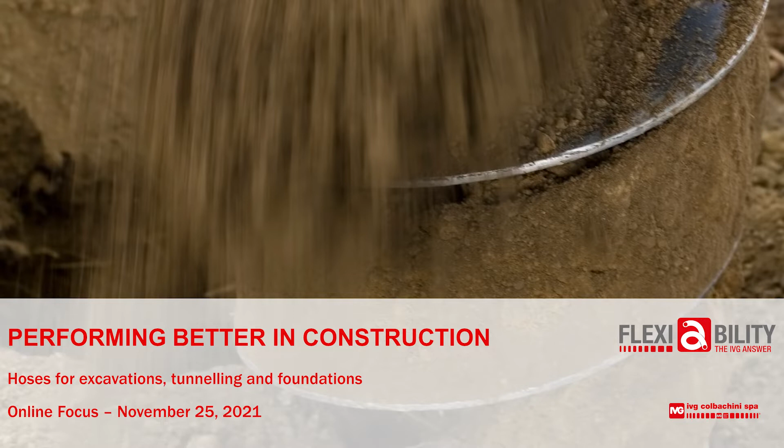We will explore a little bit a very specific field, a field where our hoses are used, engaged and involved. I mean the field of construction sites where great works are built. But to have a better idea of this, look at this video.

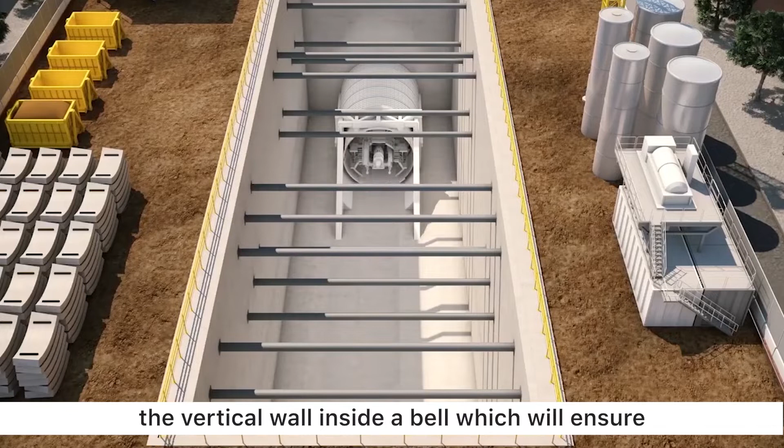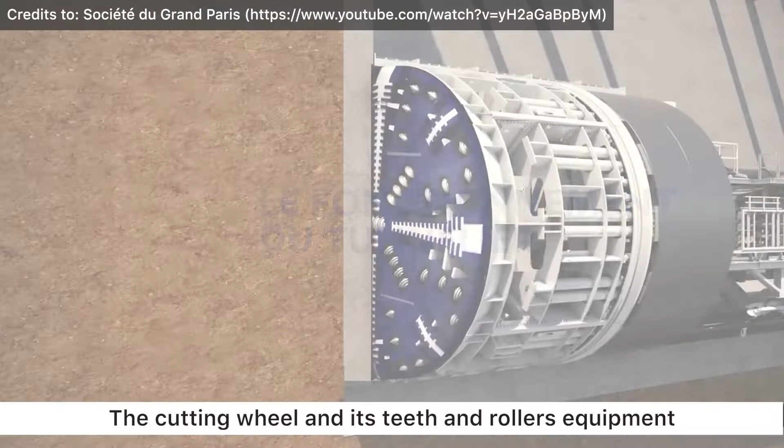Fabio now will help you and will explain how to save money and save you trouble, right Fabio? Yes, it is, Stefania, thank you. The video was amazing, and imagine that there are thousands and thousands of works like that. And imagine also that these involve plans, materials, people, costs and budget.

And imagine if any failure occurs. Your work must be perfect. We know inconveniences happen, but we want that this doesn't happen. Imagine, for example, when you have to redo your bathroom. This really happened to my family, for example. And some inconvenience occurs with the plumber or material, etc.

You don't want it at all, because you risk losing money, losing time, and I will also say being scary, being annoying, because you need to find a solution promptly. What you need is to make the right choice from the beginning. And as to the great works, I think that Stefania can tell us how IVG is involved and why there are so many IVG hoses in the field, and especially the reason for the success of these hoses.

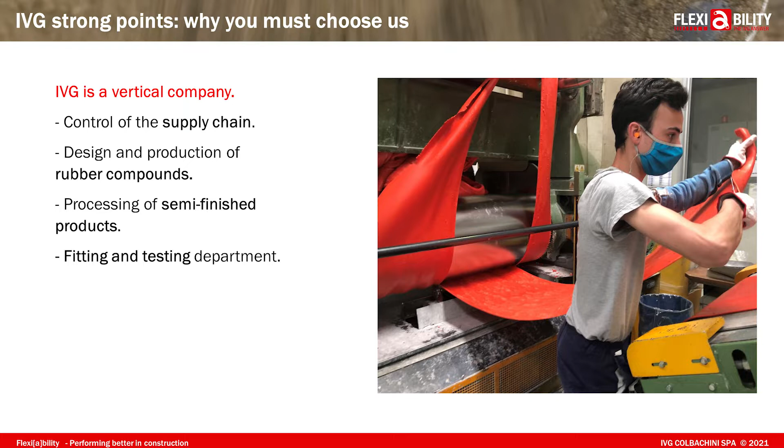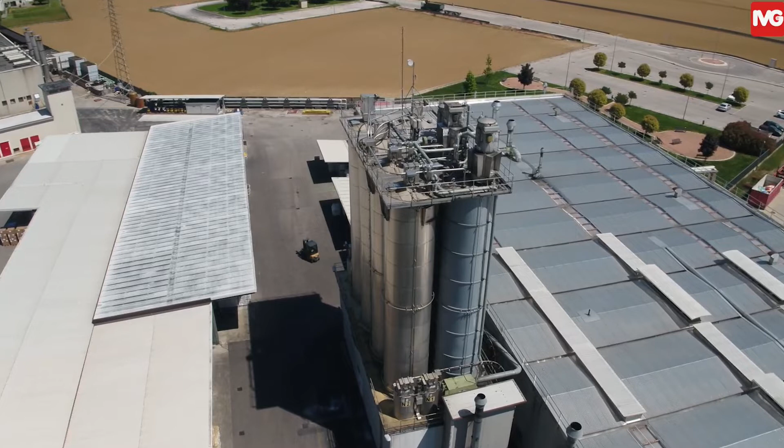Right, so Fabio, you said the right wording, the right choice from the beginning. That's why you have to rely on IVG. IVG is a vertical company, so it means that we manufacture almost everything on our own, starting from the raw materials, then semi-finished products, then hoses, and then we can afford a special hose length with the fittings, also special ones. In this particular area, construction sites, the bonding between IVG and you is very important.

This is what our major partners, which are well known worldwide companies like Trevi Group, Casagrande Group, Vinci, and Normet, relied on us for. We developed with them their own special hoses for their own machines, as you have to know that every hose in this case is different from the other one, as these machineries are different. That's why you have to start from the beginning with us.

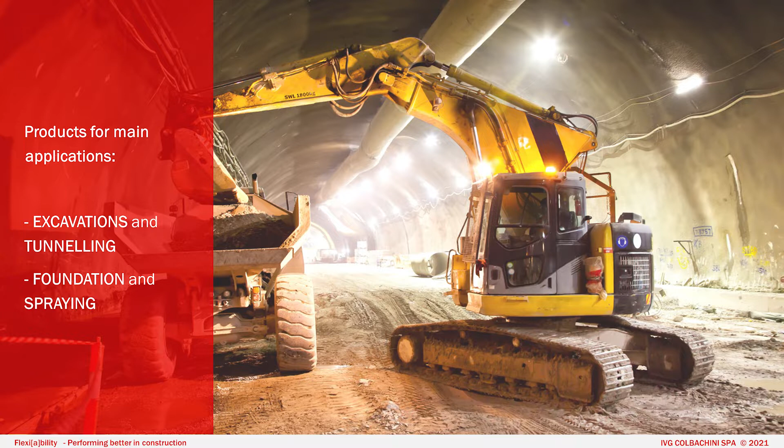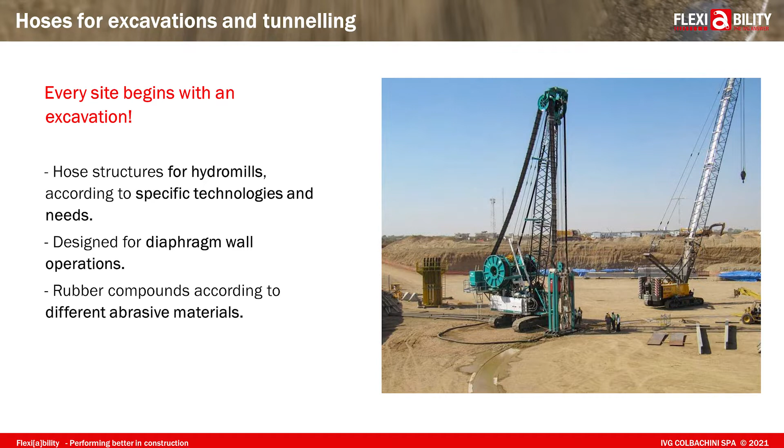And the machine used for excavation, imagine for building a mall or underground, etc., is the hydromill. A hydromill consists roughly of a crane, a machine with engines, a big reel, a system of hoses, hydraulic, pneumatic, and industrial. And one of these hoses, probably one of the most important, is an IVG hose. You know that our catalog range is quite wide, and in this range there is the Volga series. But now we are talking about a very special version of this hose, the Volga HM hydromill.

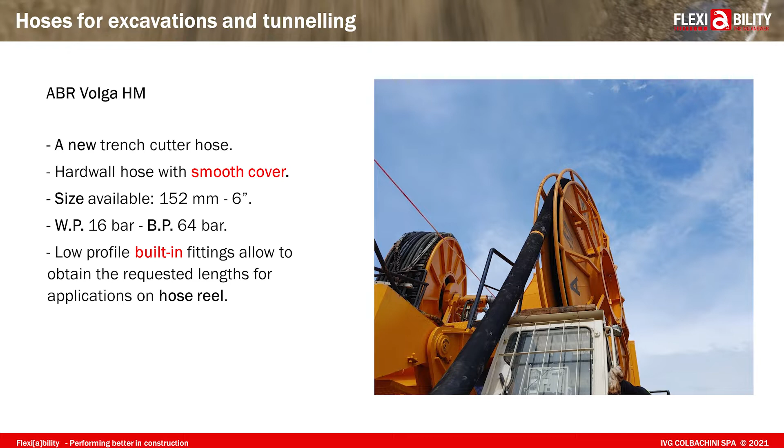Over the years, our engineers, as Stefania said, have worked with the engineers and the technical departments of the main manufacturers of this kind of machine, the trench cutter hydromills. This exchange of information led to the conception of special options, not only for the hose but also for the assembly. Because some of these manufacturers needed, for example, a very flexible but resistant hose.

So our technicians realized a corrugated version, very flexible, but also able to withstand the mechanical stresses involved in this application. It is the Volga HM OND, but there is also another version of this with a smooth hose, because some other manufacturers asked us for this solution.

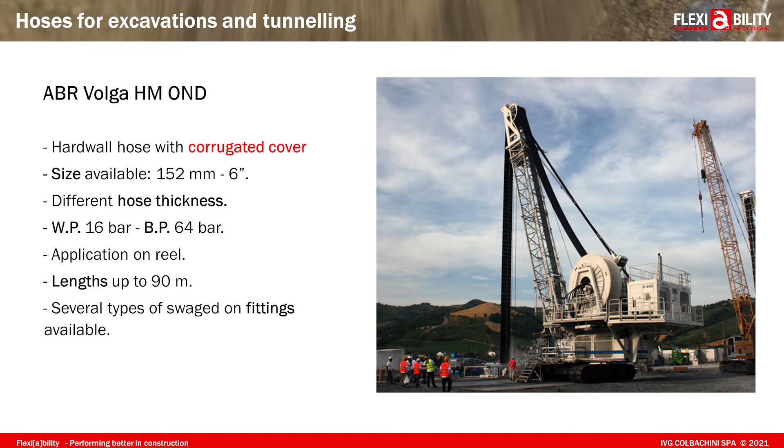I mentioned hoses, but also assembly. Why? Because not only the engineers of IVG, but also of the fitting division, the department for all types of couplings, studied the different needs and developed some specific handles, some specific couplings, and the way to connect lengths of hoses up to 250 meters.

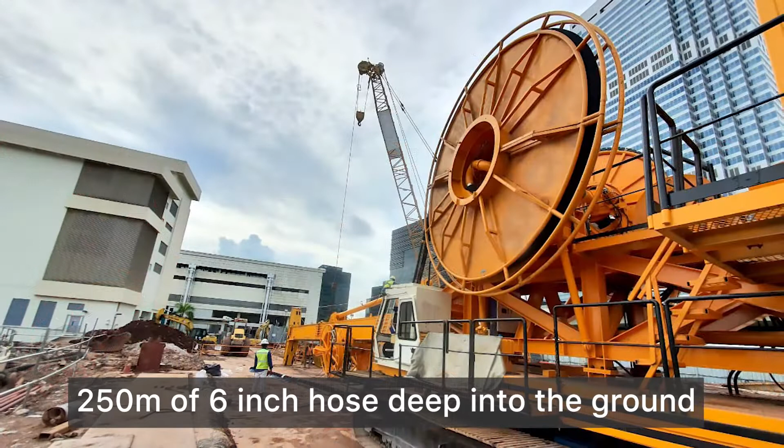Imagine 250 meters of a 6-inch hose deep into the ground. It's amazing. I know that one of our partners used this length in the project of the Mosul Dam, for example. And this is something that only IVG can grant you. But in order to better understand what I mean, I think that Stefania may help you.

We talk about TBM, so it's better to start with that. So the second part, when you have these big, great works, is the tunneling. So think about how you have to build a tunnel. Our engineers, back in 2015 or 2016, went to Switzerland as there was the building of the San Gottardo railway tunnel, not the road one, but the railway one.

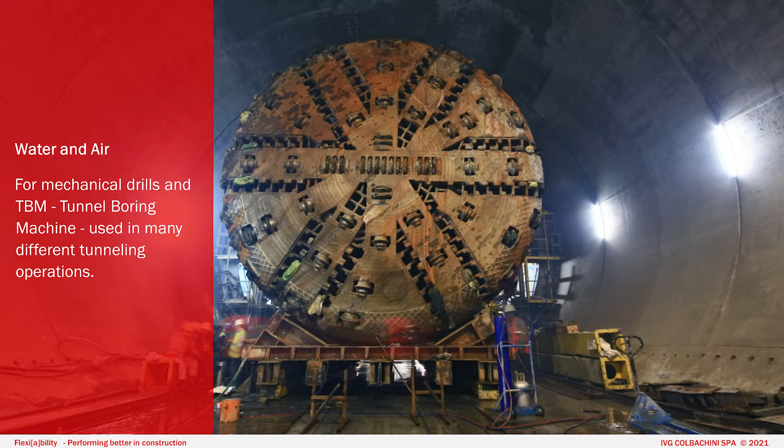And we had the possibility to look at a TBM, tunnel boring machine. We are talking about this now. On these great TBM machines, which have an incredible cutting head, depending on the size of the tunnel they have to excavate, there are also lots of reels, monospiral or multispiral, with the hoses coiled on them.

And these hoses are manufactured by IVG. Hoses which bring water, but not only, sometimes also air, used during the various phases of the construction of the tunnel. So they can be used to refresh the cutting head, or just to spray water where there is need, and all other applications and solutions where you need it. Also air, as the TBM works with the pneumatic system and electrical system mainly.

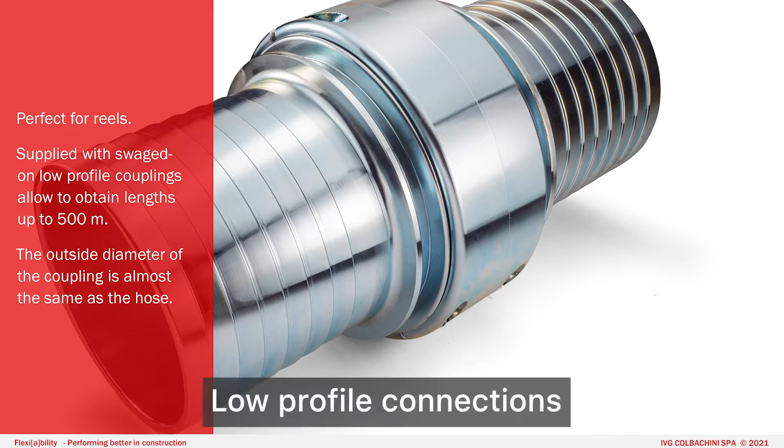We manufacture these hoses mainly with helix wire, but also without, and we can reach lengths even more than 500 meters long in various sizes, from 1.5 inches up to 5 inches sometimes. And as Fabio said, we can reach such length with special connections which we have developed. They are called low-profile connections. The most important thing of these connections, Fabio, can you help me? Yeah, you want to show them? Is that the outside diameter of the joint has almost the same diameter of the hose.

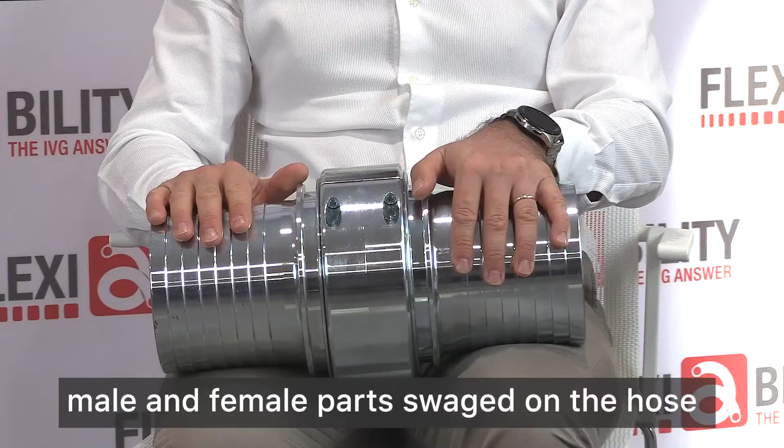So once the hose is coiled on the reel and then deployed and then moved up and down depending on the needs, the hose cover will not be abraded. The joint is made from a male part and a female part swaged on the hoses and then joined together, as you see, through a really low profile connection. And this is also very simple, as you can have hoses in different lengths and you can join them on site during the coiling on the reel. And this is really very, very important and impressive, right?

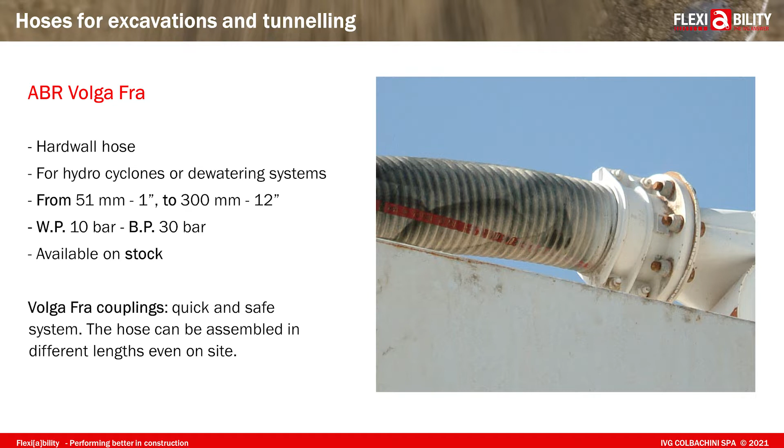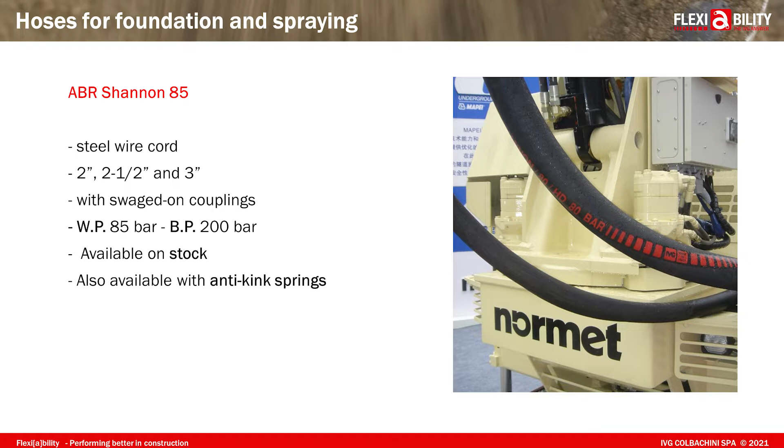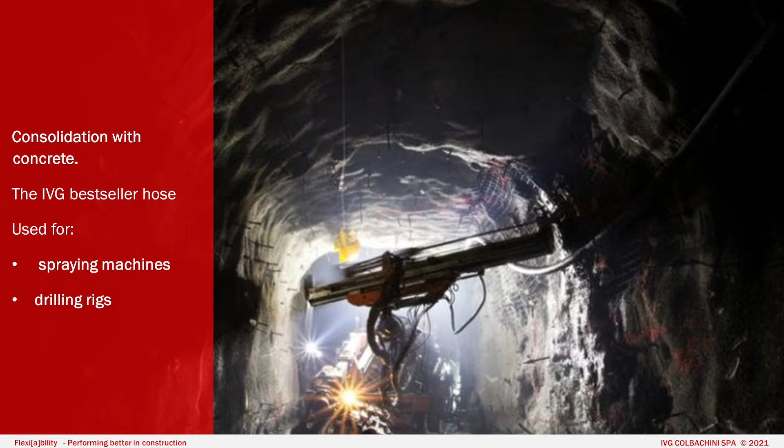Of course. Now a few seconds to show you two other hoses used in these great works fields. One is Volga, which I'm sure you know as it's one of our well-known worldwide hoses. In this case, it's used as the dewatering system mainly. And then another one is Shannon, but not the usual concrete placement hose, but in a different application, always tunneling. When you have to build a special small and medium tunnel, you use a Shannon on these concrete spray machines, which are made especially with telescopic arms and which can reach really high levels of the tunnel. And they have to spray concrete, obviously, to consolidate it.

The Shannon used in this field comes in two sizes mainly. One is a 2.5 inch, the other one is a 3 inch, and they work at 85 bars mainly, used in different lengths depending on the height the telescopic arms have to reach. So you can have hoses in 4, 5 meters up to 10 meters, so they can move and rely on the machinery. The last part of the telescopic arm, the one where there's the spray gun, the hose fixed there is with an external steel helix, which helps the hose not to kink when the spray gun is moving in the tunnel.

Stefania talked about a specific application for Shannon hose, and she underlined that you probably know the Shannon hose. It is one of our best sellers in the world, but it is applied not only for this, but also for the most common application for a concrete hose, that is placement, but also for drilling rigs. As you probably remember from one of the previous appointments of the flexibility project, we explained several different applications, including this one. And often it's you, our customers, that teach us how an IVG hose may be applied. For instance, look at the video. Once again, it will be very interesting because there is always something to discover.

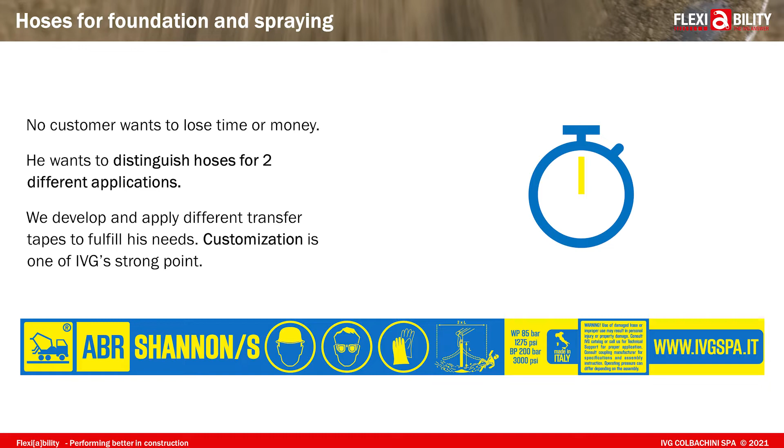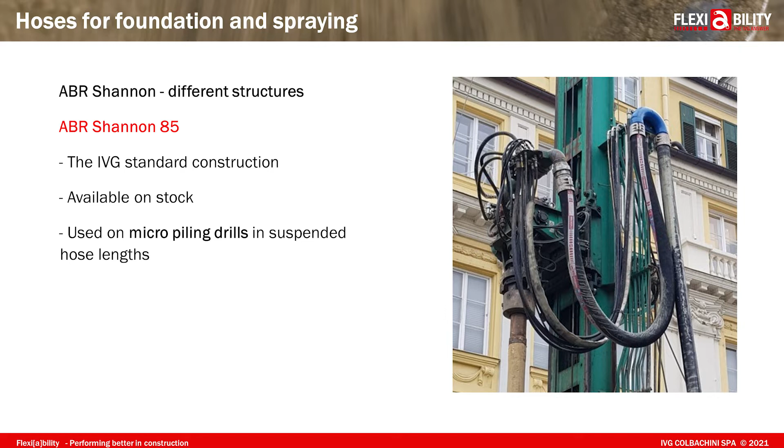Victor was talking about two different applications with the same, let's say, nominal hose, but with two specific and different structures. As in the case of the Volga HM, also for Shannon, there may be some mechanical stresses very impacting on the application, on the hose, on the system. So what we did during the years was to study different versions, different constructions of the hose with specific metallic reinforcement and other specific features, especially at the ends of the length.

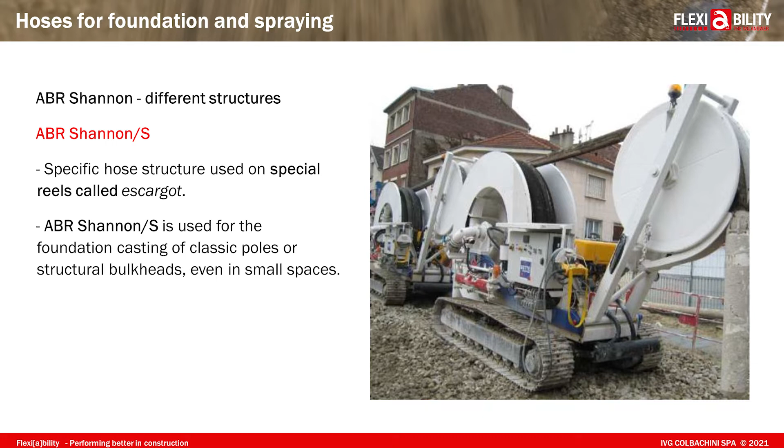In the case of escargot, a very specific construction of the hose and the assembly was designed by our technician. Indeed, this specific machine makes the hose descend deep into the ground, up to 100-120 meters. So you can imagine that the forces involved are very strong and impacting on the hose. And you cannot allow that there is inactivity of the machine. You cannot allow that there is no concrete placed 100 meters underground. Otherwise, your work will be not perfect as you want.